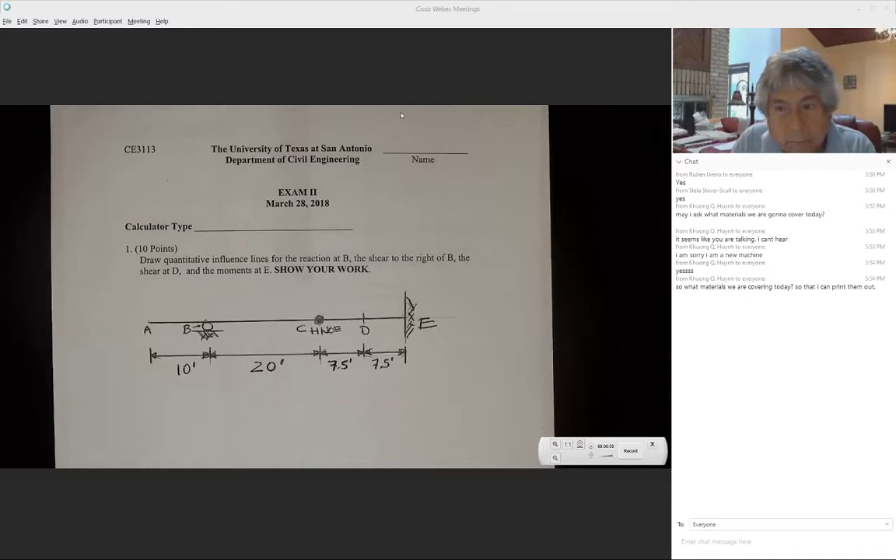Okay, you're very welcome.

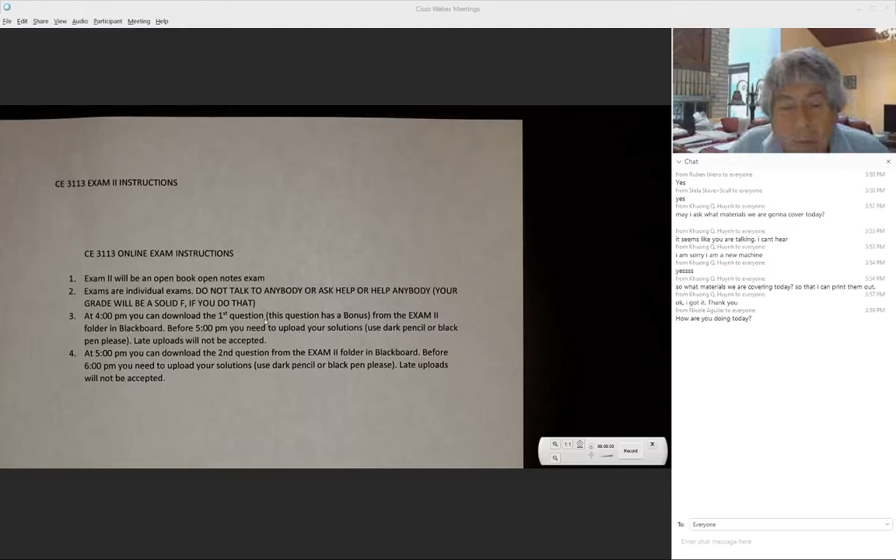And like I said also before, everything is open book and open notes, but don't talk to anybody. If somebody asks you for help, say no, and don't ask anybody for help.

I forgot to mention to everybody the other day that in this course, the grading is not going to change. It's going to be a letter, A, B, C, probably, I don't know about D's and F, but it's letter. It has not changed. The courses that changed to credit/no credit, you can still ask for a letter to be given to you, but we don't have that problem in this course.

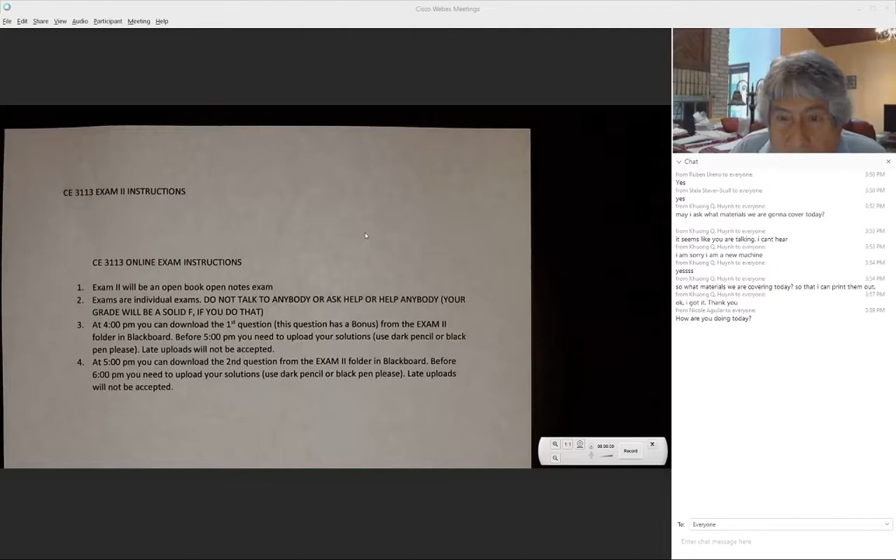Also, you already know that all the summer courses are going to be online. We don't know about the fall, but everything in the summer is going to be online.

Today I'm going to start the review, and I'm going to continue on Monday also with the review. In Blackboard you can find the review file, however I forgot to number the pages. So today is going to be a review, Nicole, and Monday also is going to be a review. I'm going to cover influence line for beams, influence line for trusses, deflection rotation for beams, and also for frame.

So this is the first problem. Any questions about anything, any clarification, concern before I start?

Okay, so I'm going to start now. We have 37 people in the room.

The day of the exam, besides you being able to download it, I will put problem number one on the screen the same way that I'm putting this in here. If you cannot see, tell me, I will increase the scale. I will zoom. So that's what's going in the exam.

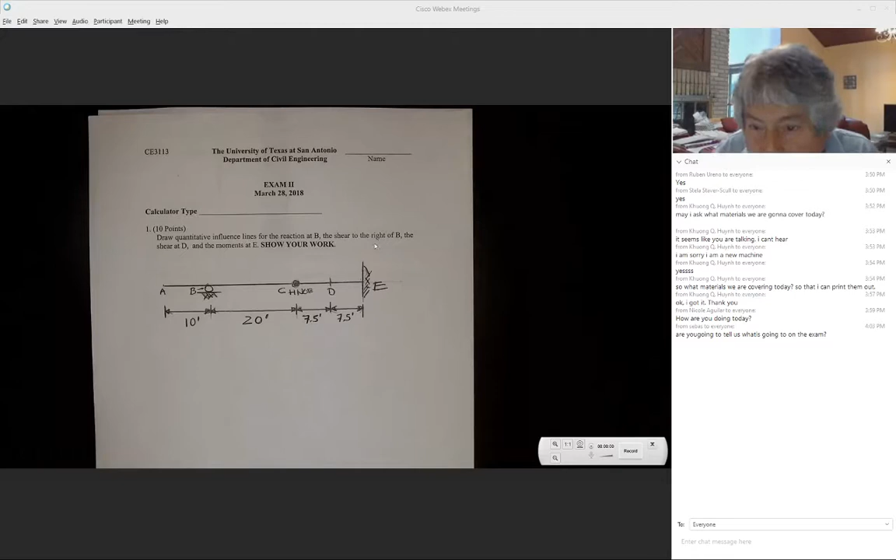I already told you what's going to be in the exam. It's going to be influence line, it's going to be deflection and rotation, and the bonus, one little bonus.

On Monday, if you come early, I'm going to tell you, I'm going to give you more detail, more focus about the exam. So make sure that you are on time on Monday. Any other question?

So the day of the exam, besides you being able to download it, I'm going to put it on the screen. I'm also going to put the chat, so if there's any question that you don't understand about the exam or whatever, let me know and I will make a clarification for everybody. I need you to turn your camera on during the exam, but your microphone off. If you don't have a camera, don't go and buy any camera, that's okay, I just want to see your face.

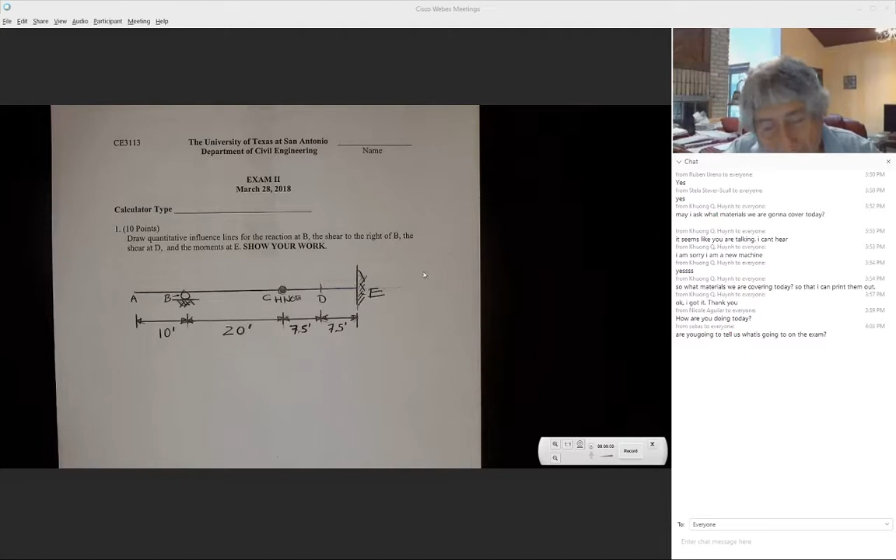So the day of the exam, this is going to appear something similar in front of you. And every page, you have to put your name and make sure that you use a black pen, very dark pen, or black pencil or whatever, but make sure I can read whatever you're going to send to me.

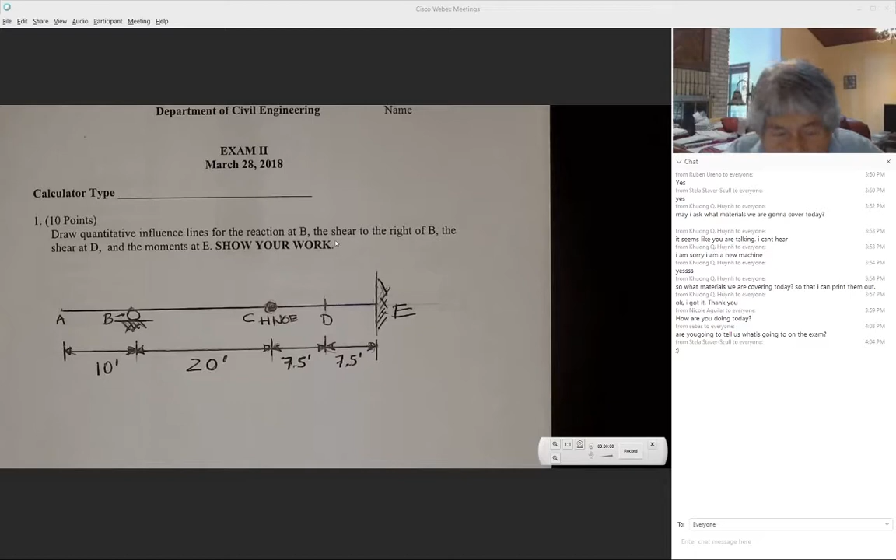In here, I want the reaction at B, the influence line for the reaction at B. We need to find out what's happening at B when the live load goes across the structure, whether it goes left to right or right to left—it makes no difference. The other question, which is always difficult, is the shear to the right of B: just a little bit to the right, there's a section, and we need to know how much the shear changes at this section as the load crosses the structure.

And the shear at D—so we need to know at this section what happens with the shear. And the last one is the moment at E.

So what I had done: since I need to put the load at A, I also need to put the load at B. To the right of B, I need to put the load. To the left of the hinge, I need to put it. To the left of section D, I need to put the load. And at E, I need to put the load. So I created all of these cases.

Even though some of them are obvious. This is the one where we need to compute the reaction when the unit load is at A. The second case, when the unit load is at B, is an obvious one, because when the unit load is at B, we know that the reaction at B is going to be equal to 1. So whenever we have this situation, the reaction at B equals 1.

And most of the time, I do not work this one out—I just show this one on top.

Why do we only put the load to the left of C and D? We put the load to the left of C because in one case the value here is going to be 1, and in the other case it's going to be 0. We put it only to the left of D because whatever we find here to the left of D, to the right it's going to be 1 minus whatever value we obtain here. If you worked it out to the left and to the right, you'd get exactly the same result.

So for the shear, we put it to the left because the value to the right is going to be 1 minus that value, and I'm going to show it here. This case is the easiest one because 1 at B—this is 1. The shear to the right is 0. The reaction is 1. The shear here is 0. Everything is 0 when this is here, with the reaction being 1.

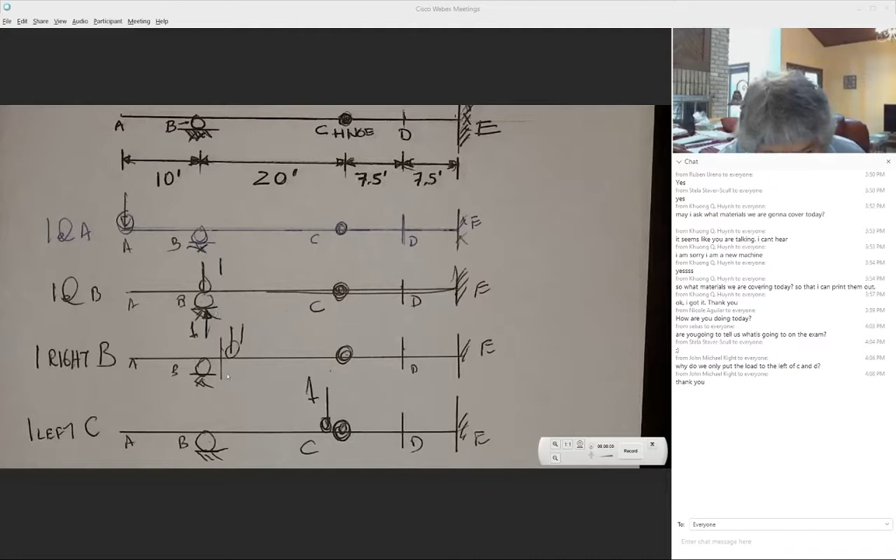I have put another case—this is a section to the right of support B. I put the unit load to the right because the previous case had the unit load to the left. So I'm going to create one just a little bit to the right. This is the case mentioned before.

We do it just to the left of the hinge because at one time it's going to be 1 and the other time it's going to be 0, since the shear here goes from 0 to 1 or from 1 to 0. And this is the one I was saying for the shear at D—we just put one to the left because whatever value we obtain here, the next one is going to be 1 minus that value. And of course this is an easy one, the last one.

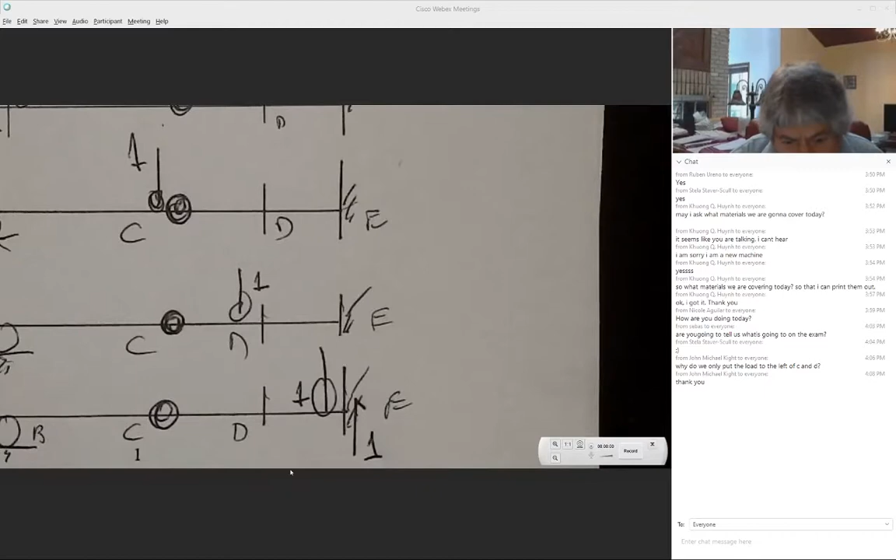Because the unit load is at E, the reaction at E is going to be 1, and there is no more. So I'm going to change the scale, and these are the cases. I never do this one, and I never do this one—I just want you to know.

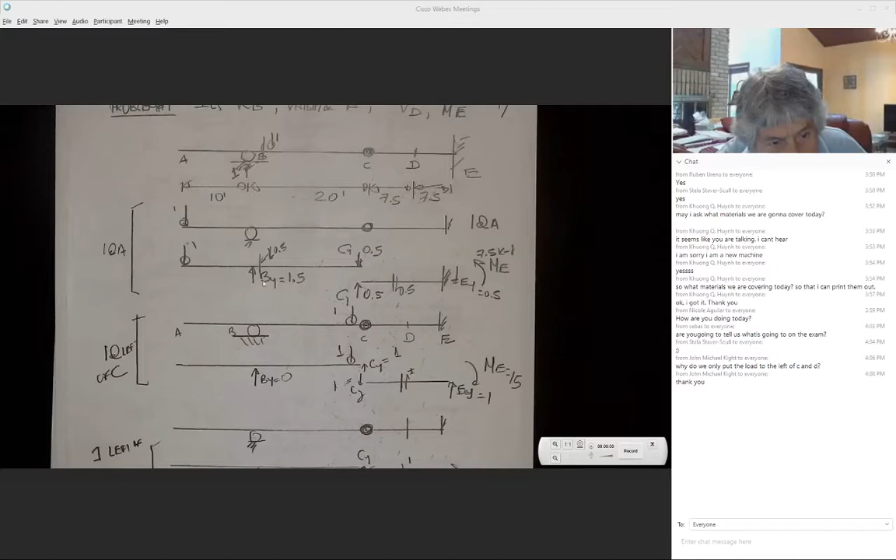And I had computed, since they want the shear to the right of B, I have taken this free body. Look at this free body. I'm taking the free body and doing summation of forces in Y. We have 1 going down and 1.5 going up. The shear in here is 0.5 going down.

And I'm using this free body. So this shear is positive or negative? Anybody?

Look, I'm taking this free body here. I'm computing the shear just to the right of B. By definition positive, this is positive. And don't forget, both of them, this is the right side of the free body, down positive, left side up.

So I was just taking advantage of this free body to check this body. But now I have to transfer this force, equal and opposite. Look, these are internal forces. These forces, we don't see them. We only see these forces when we take our free body. The 0.5 that I computed from here, equal and opposite, 0.5. If I do summation of forces in Y, and here I have to go down 0.5, equilibrium.

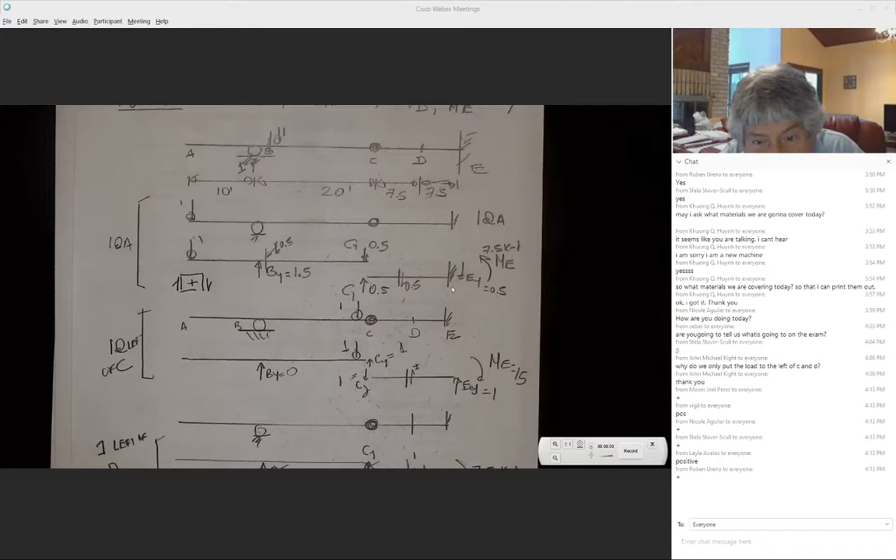If I apply moment about the wall, 0.5 times this distance, that is 15. This is 15. 0.5 times 15 is 7.5. My acting moment goes in this direction, the wall shows one in the opposite.

So if you look at my first computation, when one is at A, they want the reaction at B, the shear to the right of B, the shear at D, and the moment at E. So when the unit load is at this location: the reaction at B is 1.5, the shear to the right of B is 0.5, and the moment here at the wall, at E, is 7.5.

And if you look at where this moment acts, where is the compression, top or bottom, if you do what I normally do with this, and you bend it. So where is the compression here, top or bottom? Top. So this is going to go on the top whenever you draw the influence line for the moment at E, goes on the top.

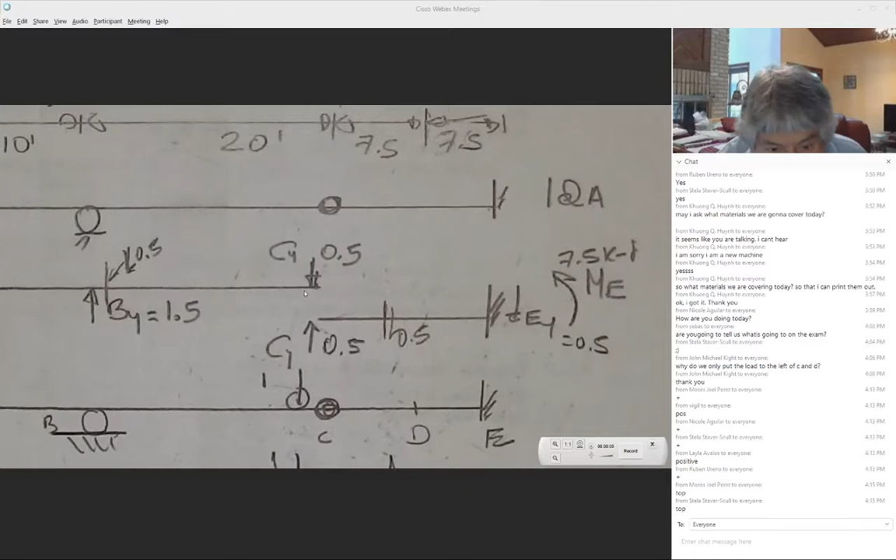Look at the shear to the right, or the shear at section D. I'm taking this section in here just to compute its value. So we have 0.5, they have to go 0.5 down. And based on what we did before, positive or negative? Positive.

I have here at the bottom of the page the values that we just computed for the influence line for the reaction at B. When the unit load was at this location, we saw it produce 1.5. The shear to the right of B at this location, you told me that was positive and 0.5. The shear at D, you told me that was positive and 0.5. The moment at E, you told me that was 7.5 on the top. So all of these values that you can see in here, when the unit load is at this location, is producing those values.

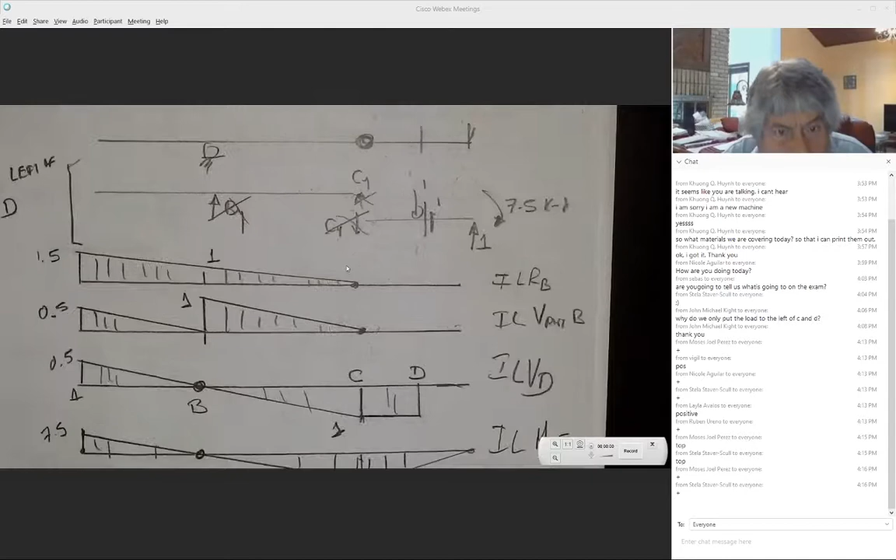When the unit load is at A, this reaction is 1.5. The shear to the right is 0.5. The shear at D is 0.5. The moment is 7.5. So all that we had done, we found all of this value.

With this case, any question up to this point about that?

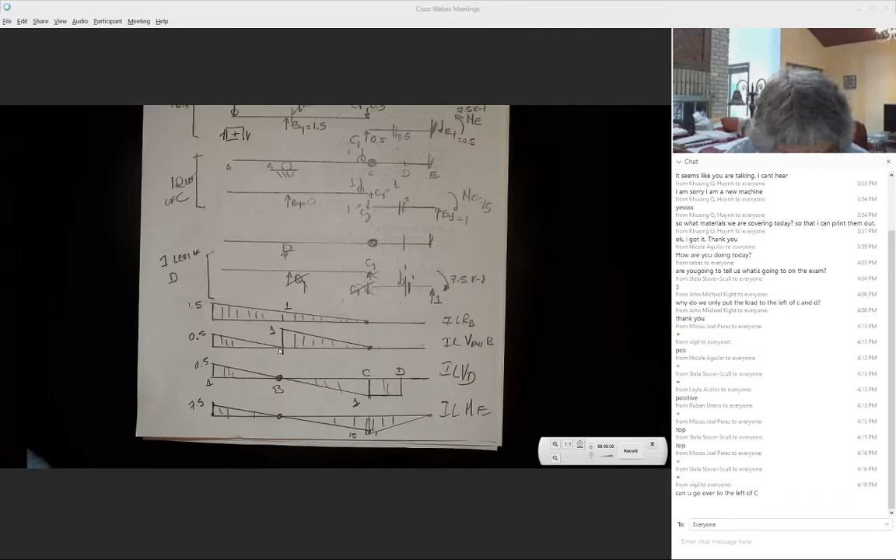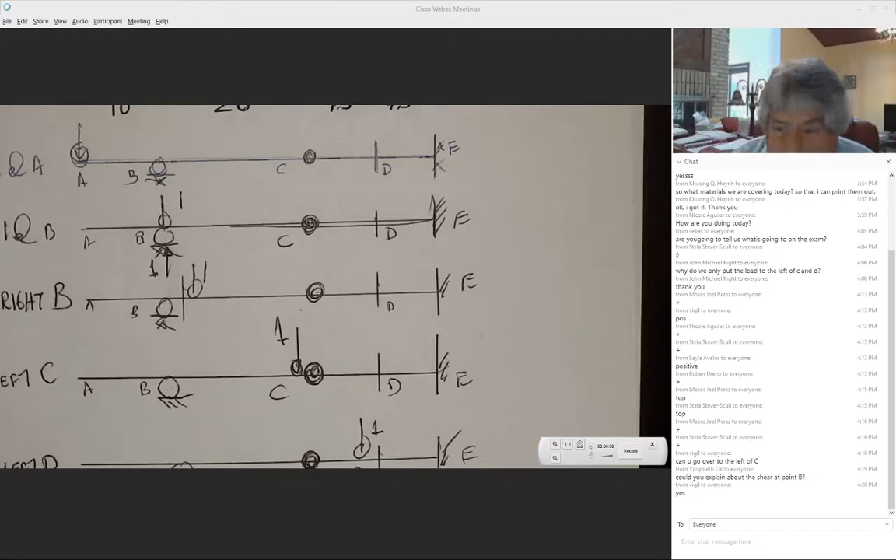and this is, Lik, the shear at point B. I'm going to go back to the other, but I'm going to do this. I want the influence line for the reaction at B, the shear to the right of B, the shear at D, and the moment at E.

Lik is asking the shear at point B. At point B, we do not have shear. At point B, we only have a reaction. We cannot ask for the shear at B. We need to ask for the reaction at B. We could ask shear to the left of B, or like in this question, the shear to the right of B. So this is B.

We want to know the shear to the right of B. So, Lik, what are you asking? I really don't know exactly what you're asking. There's no shear at B. There's only a reaction at B. But we do have shear to the left.

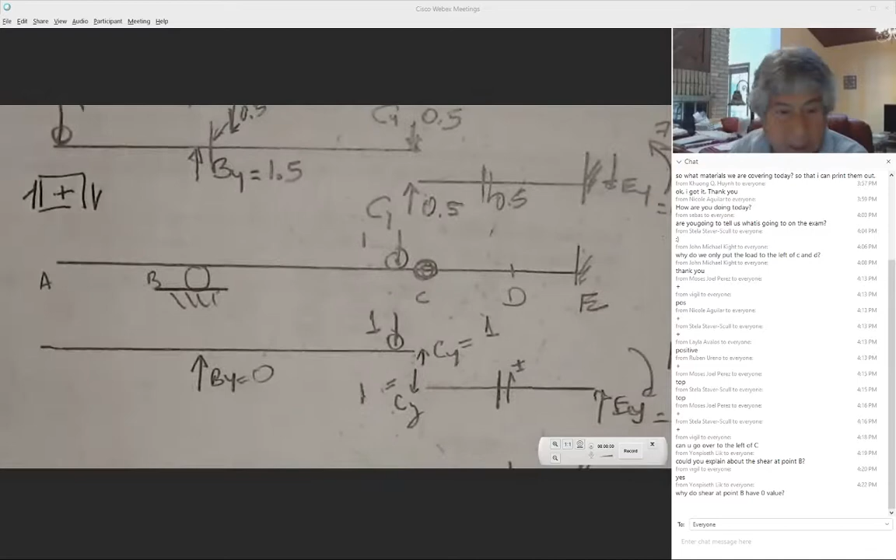Why does shear at point B have zero value? Okay, and again, there's no shear at B. There is shear to the right of B. I think that's what you're asking. I think, if I'm not getting confused, this is the influence line for the shear to the right of B, and this is zero.

Are you asking for that, or are you asking for this? Yes, Professor, what are you asking? I'm asking about the shear, why it goes to 0 and goes to 1. Okay, I'm going to explain it to you right now. So the question is, this is to the right of B. This is not at B, because at B we only had a reaction. So I'm going to show you right now.

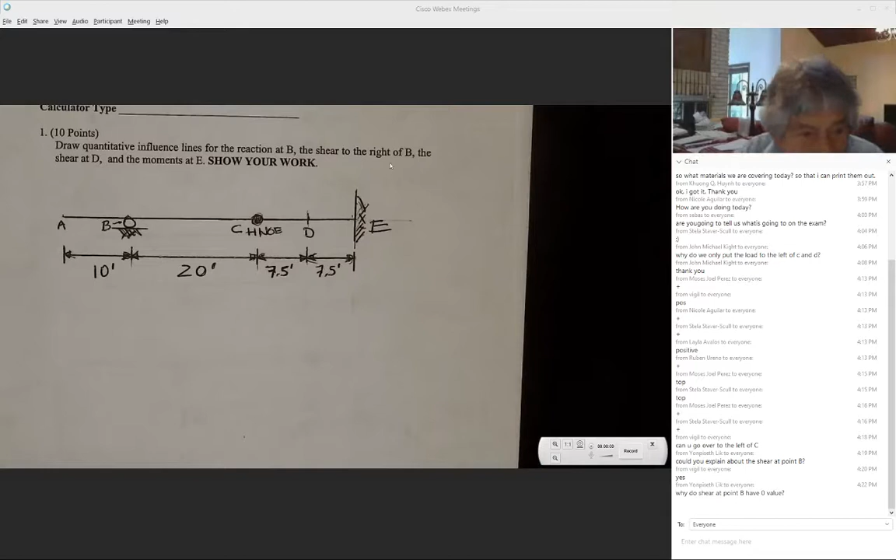I'm going to use a clean sheet, and I want everybody to pay attention because this is a very good question. Look, I don't know, this is what I see in my house, I see it huge, it's huge. I don't know what you see on your screen, but

this is a section to the right of B, and we want to find the shear at this location. So I'm going to put, because the case that we're looking at is this. This is the case that we have right now.

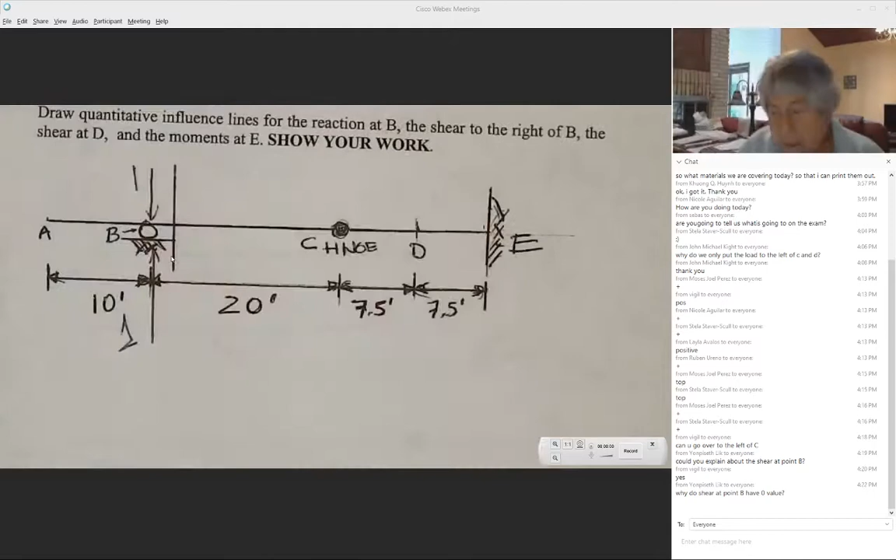When the load is over this support, right, everything else is going to be zero. If I take this free body, I'm going to take it in here, because it is a good question. So whenever I say take a free body, I'm taking this free body. So this is the same free body, and here I change. And this is one, and this is one.

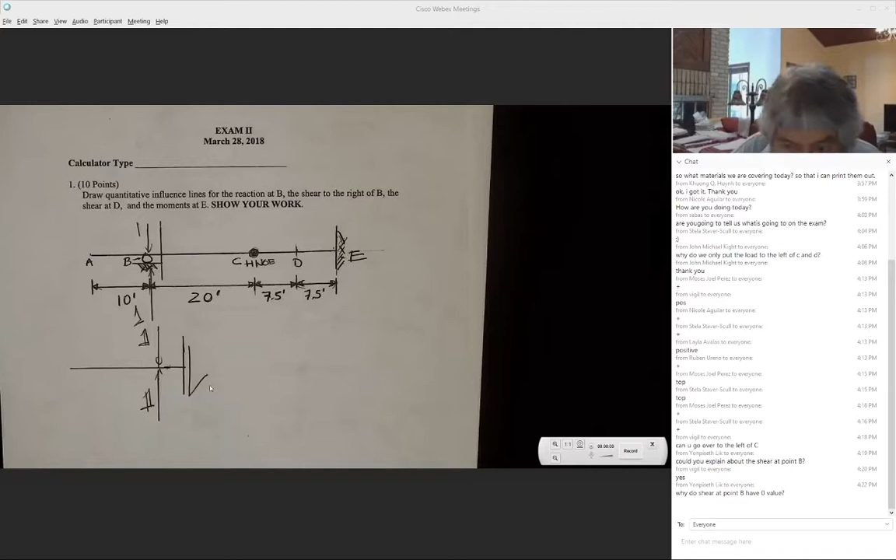If I do summation of forces in Y, what is this value of the shear in here? 0. Where is the load? Where is this load? This load is at B.

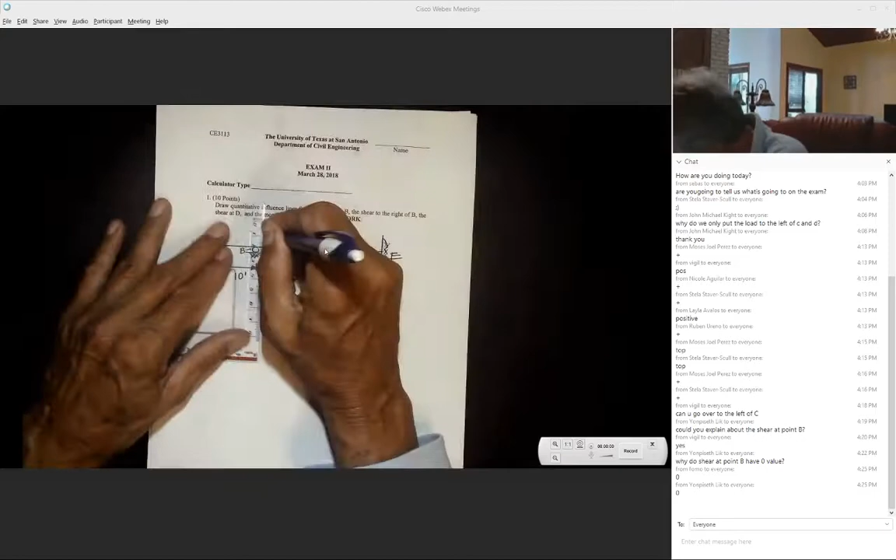This is my influence line for the shear to the right of B. When the load is at B, the value is 0. So I'm going to go ahead and show you something else. The load has moved to this location, because this is just a little bit to the right of support B.

What is this reaction in here? What is that reaction in there? Anybody? When this is just a little bit like 0.0000001 to the right, what is this? Yeah, 1. Because it's 0.999999, I'm going to take the free body. Look at the difference: before, the load was over the support, and it was 0. This is my same free body.

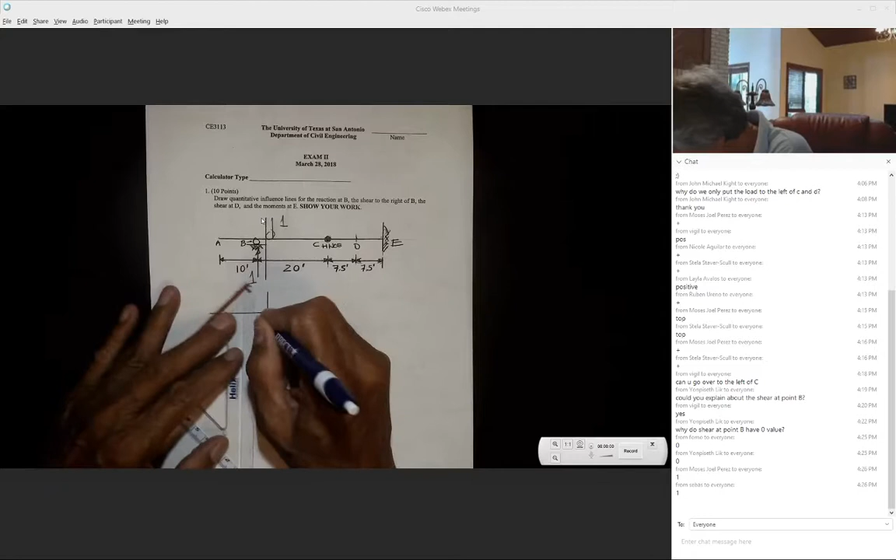I'm taking this free body. Does the load appear on my free body? Look, this is my free body. Do I need to put the 1 in there?

No. So this is like when I told you in class, you go to the international border, you are on the bridge. This is USA, this is Mexico. You already went to a different country. This load is no longer in here.

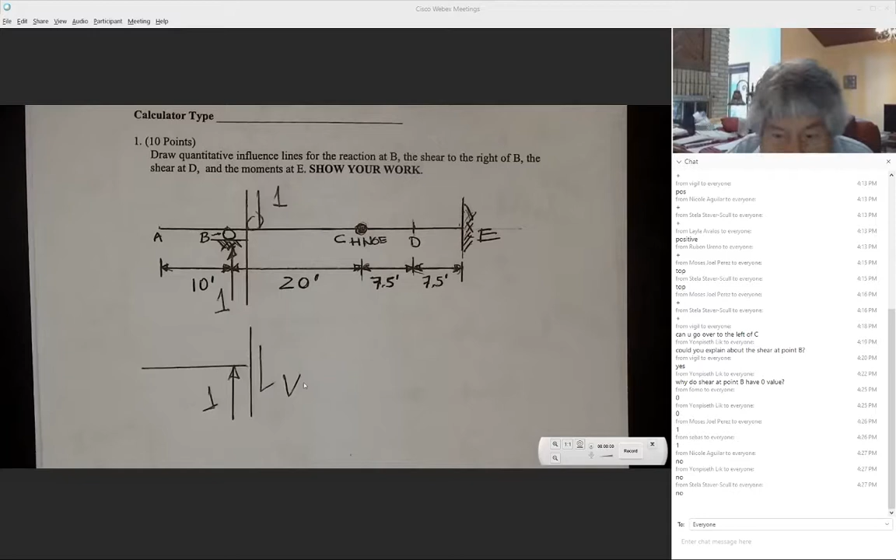So when I do summation of forces in Y, what is the value of this shear? One. Positive or negative? Good.

So this is the influence line for the shear to the right of B. Look, it went from 0 to positive 1. And that is the reason. But this is for a section just to the right of B.

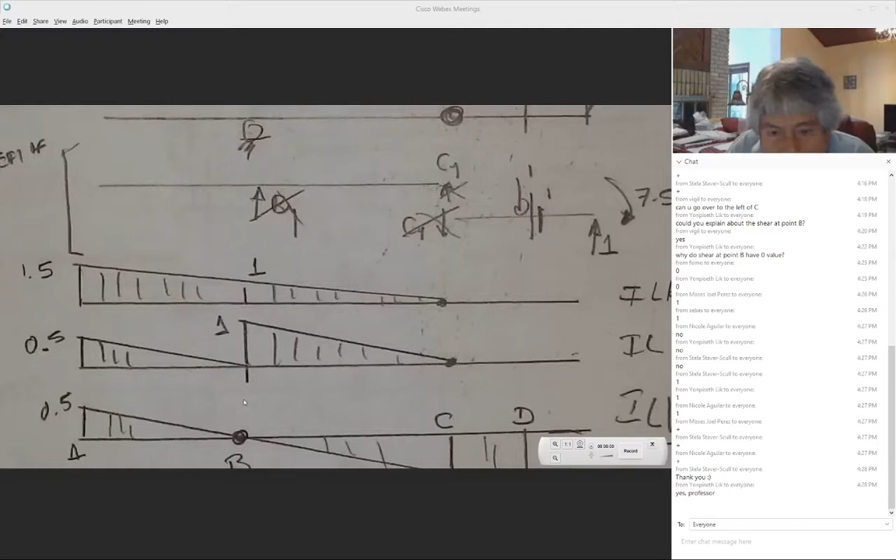Lik, do you get it? Lik. Stela. Okay, good.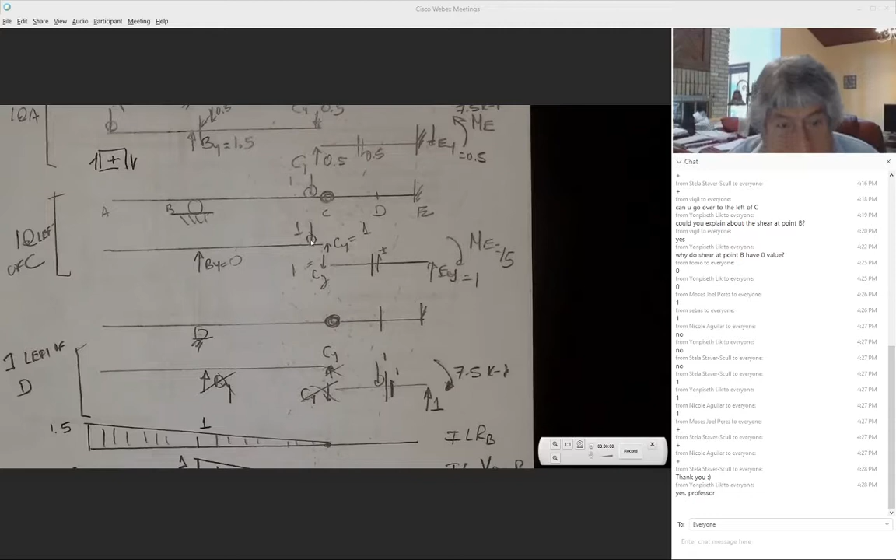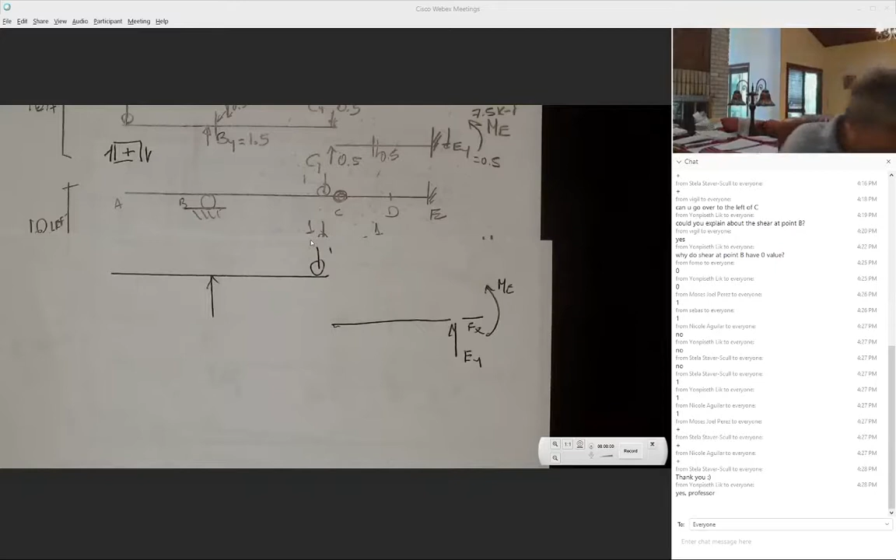that whenever I break it, I have to look at the forces that I have. So at C, I'm going to have a force called Cy. I have to have an equal and opposite. So whenever I break this at the hinge, I have to show these internal forces as equal and opposite.

So now I'm going to apply moment about this point. And since both of them, there's no other force, I have to apply moment here because we learned that a long time ago in statics. I need to get rid of this force. This force times this distance and this force times the same distance.

It's obvious that this is going to be 1 because the distances are exactly the same. And if this is 1, this has to be also 1 because internal forces gave me equal. This has to be equal and opposite.

So now that I know that when I do summation of forces in Y, 1 and 1, what is the value of this reaction? If I have 1 and 1, what is this reaction here? Anybody? 0.

So that is gone. That means that when I do summation of forces in Y and here, this is going to be 1. And the moment there is going to be 1 times 15. So this moment here is 15.

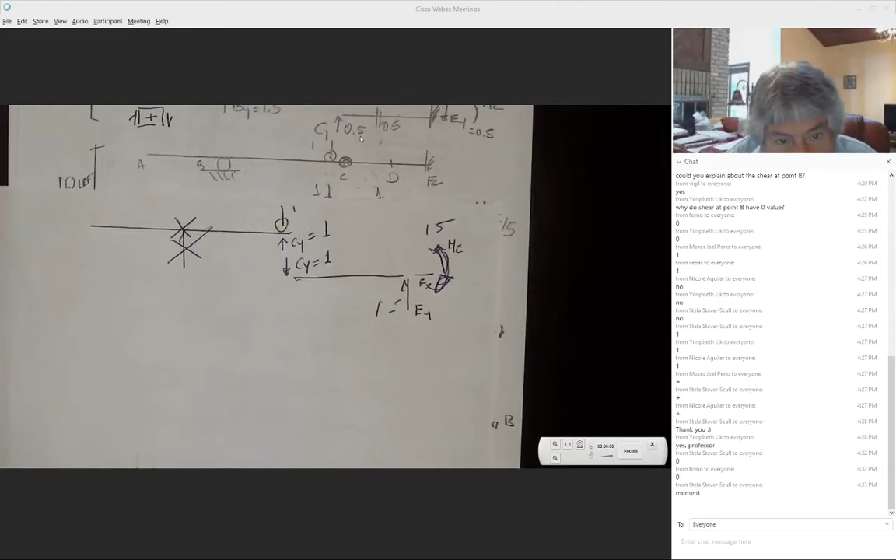So look, when the unit load is to the left of the hinge, this is 1. If I put the unit load to the right, what is the value that I'm expecting in here? If instead of here I put it in here, what is the internal value I want to find? 0. Because at any location, it has to be equal to 1. I already have 1, the other one has to be 0. Like we did from the shear to the right of B, 0 went to 1. So this is what I have.

The unit load is to the left of C, only one load at a time. This can be equal and opposite, one and fifteen.

So whenever I look at this situation, when the load is at this location, what is the reaction at B? Zero. What is the shear to the right of B? Look at this in my case.

The unit load is to the left of the hinge. So my reaction at B is zero. What is the shear to the right of B? Anybody? Shear to the right of B?

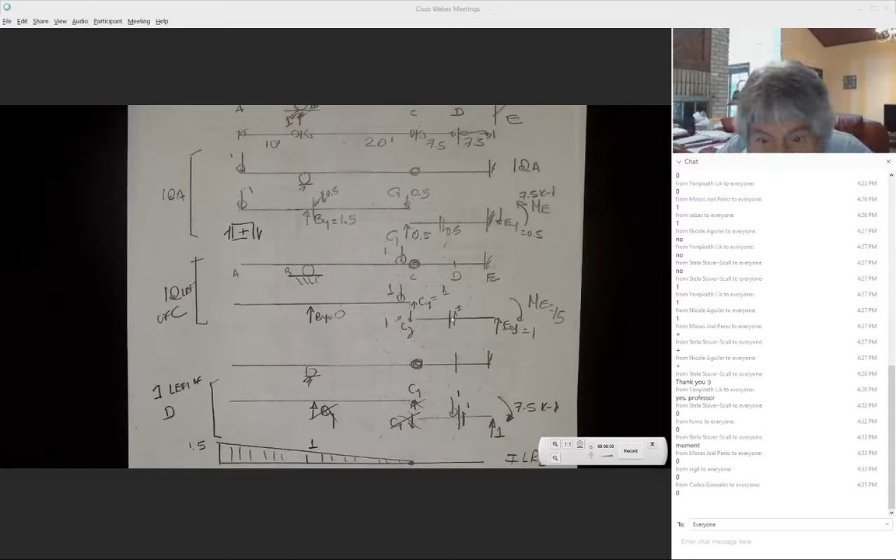Zero. And look, the shear at D, look, I had this free body. One down, one up. The magnitude of the shear is one. Positive or negative?

Listen here. Negative, correct. So it's a one. And when the unit load is at this location, look, what is the moment at E? Fifteen. But this moment goes on the top or on the bottom?

Look, where is the compression, top or bottom? Where is the compression? Bottom. So now I'm going to go to the influence line.

When the unit load is at this location, look, here on the top, the shear at B is zero. The shear to the right of B is zero. The shear at D is one.

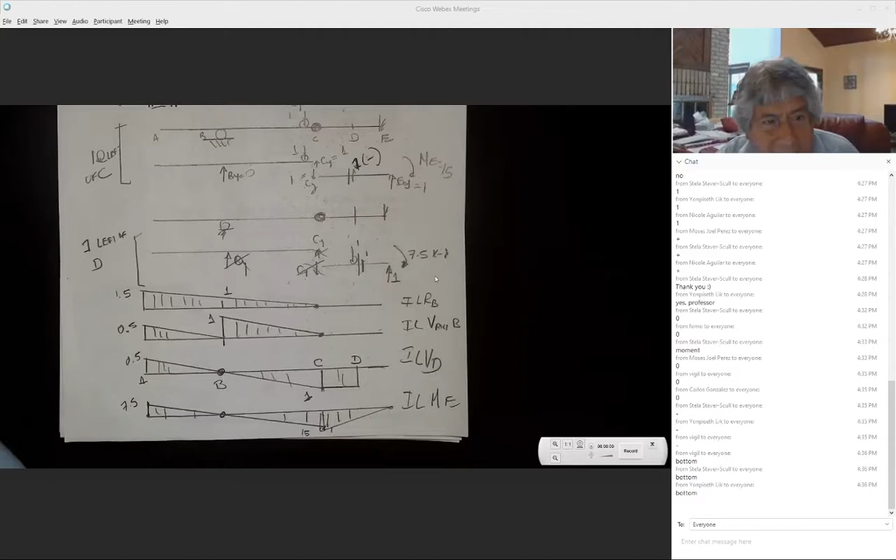And the last case that I had to do is this one. Shear to the left of D, because whatever value I can find by computation here, the other one is going to be one minus that value. So this is the case that I have.

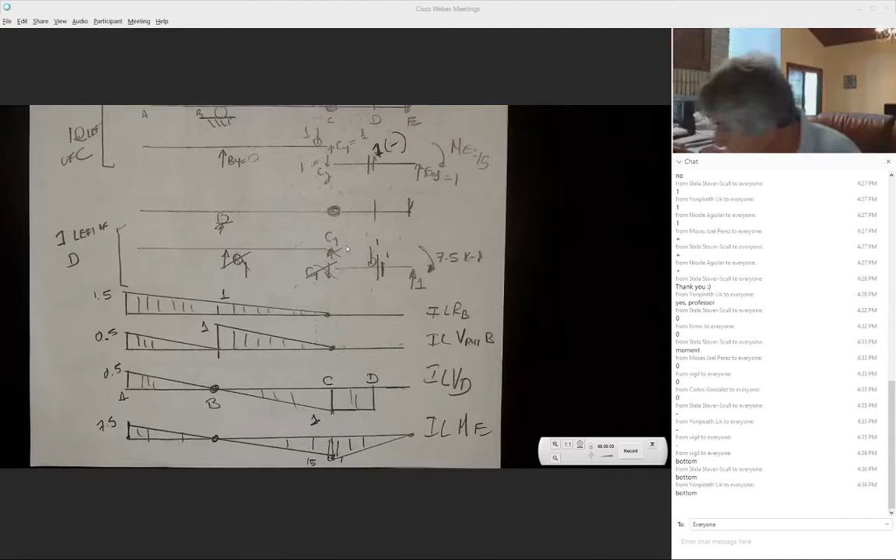In here, my shear force is to the left of this section. So I broke it into two free bodies. And when I break it into two free bodies, I'm supposed to have a reaction here, internal force, internal force. And when I work with this one, when I do summation of moment about this point, I'm going to have

Cy times the distance 20 equal to 0. Cy times the distance 20 equal to 0. Goes to the right of D, the shear goes to 0.

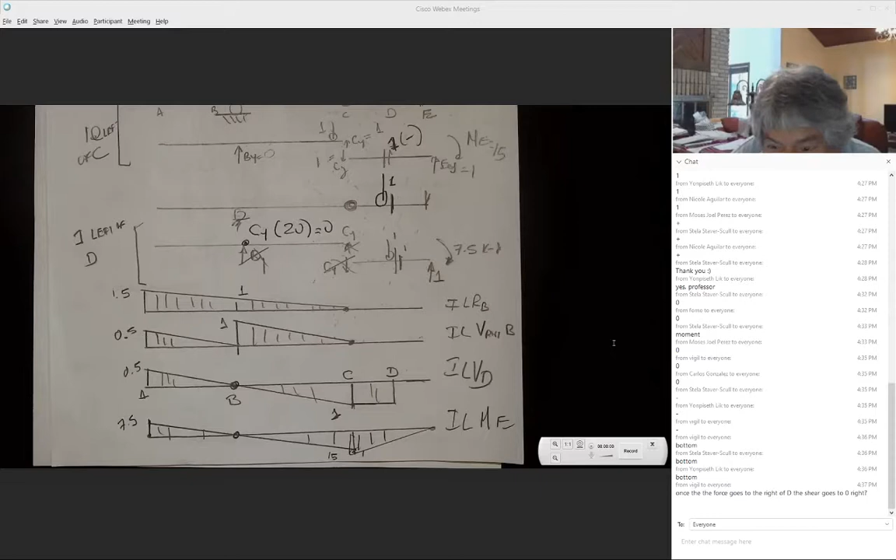Vigil. When the force goes to the right of D, the shear goes to 0. I'm going to show you in a little while, but that's a good observation.

Look, let's do this one first. So, look, I apply a moment on this point. Cy times 20 for a reaction to multiply this and be equal to 0, that means that Cy has to be 0. That's why I killed Cy in here.

And I did summation of forces in y, By is also. This case is where most of the students made a mistake. They put a one in here and they put a one in here. It's not going to be in equilibrium because you're going to have a moment. So the only way that this could be in equilibrium is this is 0 and this is 0, and this is the proof.

So if this Cy is 0, this has to be also 0 because they have to be equal and opposite. So now I come to here. I have one, summation of forces in y to be in equilibrium, one. Summation of moment, this is 7.5, this moment 7.5.

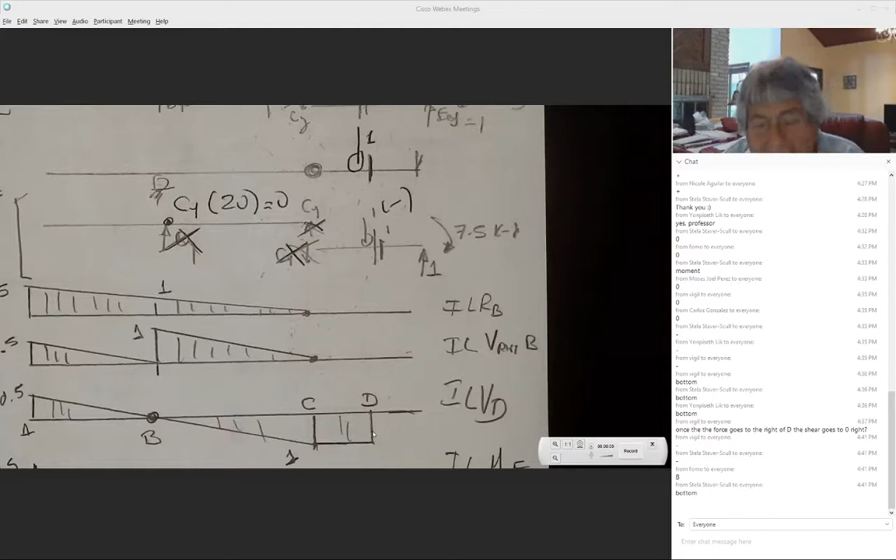Look, one. And we always say, whatever we're doing here, if one is 0.2, the other one is 0.8. If this is 0.6, the other one is 0.4. And since this is one, the other one is going to be 0. So if this is 0, I need to find out what is the value in here. And the value in there is given in this case.

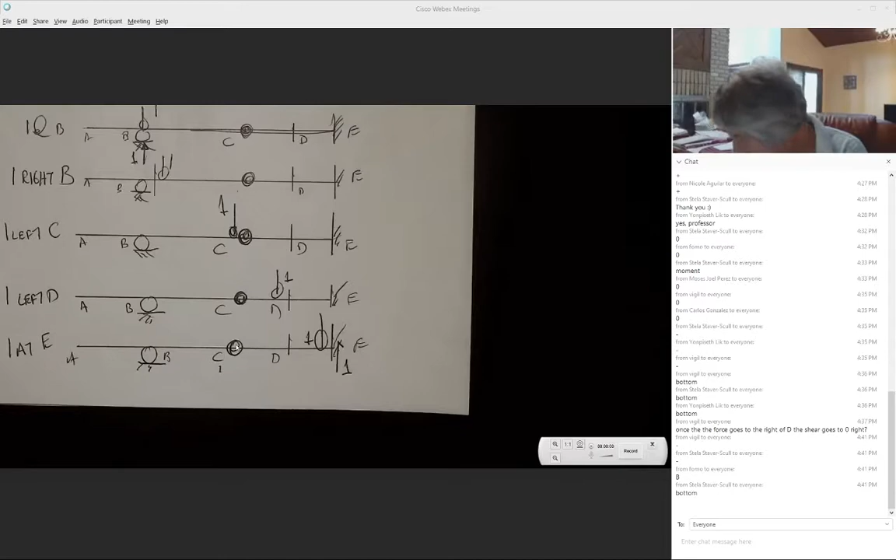When the unit load is at this location, this is 1, and everything else is 0. That's why the influence line goes from 0 to 0. So that was a good observation. And look, when the unit load is at this location, the moment at 7.5 — you told me it was at the bottom. Look, this is 15. This in here is 7.5 because it's exactly the middle.

When the unit load is in here, everything is there. Any questions about this problem?

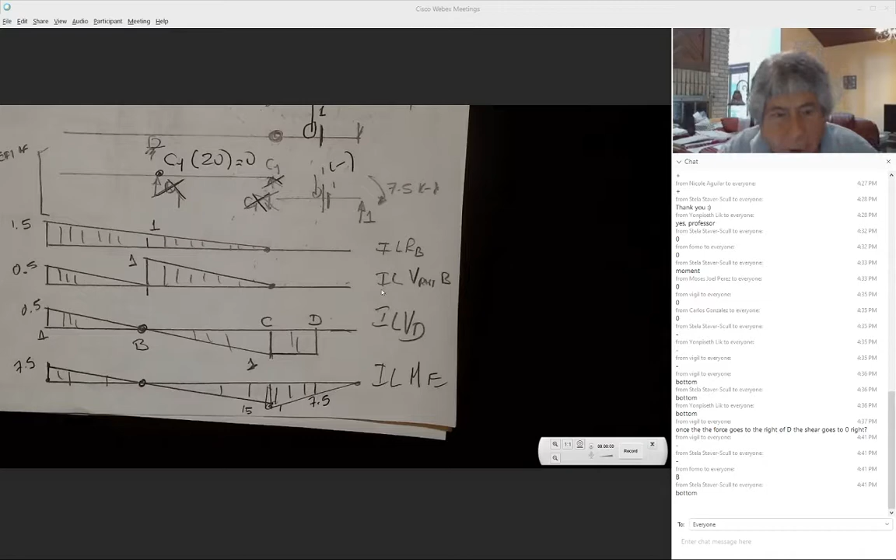If you think of another question later, just let me know by email, or when I come back to the classroom. But all of these problems are solved the same way. Once you get your exam, you read it and find out what I asked. It's like shear to the right of B. We do not have shear at B, only reaction. There's shear to the right and shear to the left. Always, the unit load is placed at the end, at the support, to the left or right of the hinge. For shear, we put it to the left because to the right is going to be 1 minus. For the moment, we just put it in here.

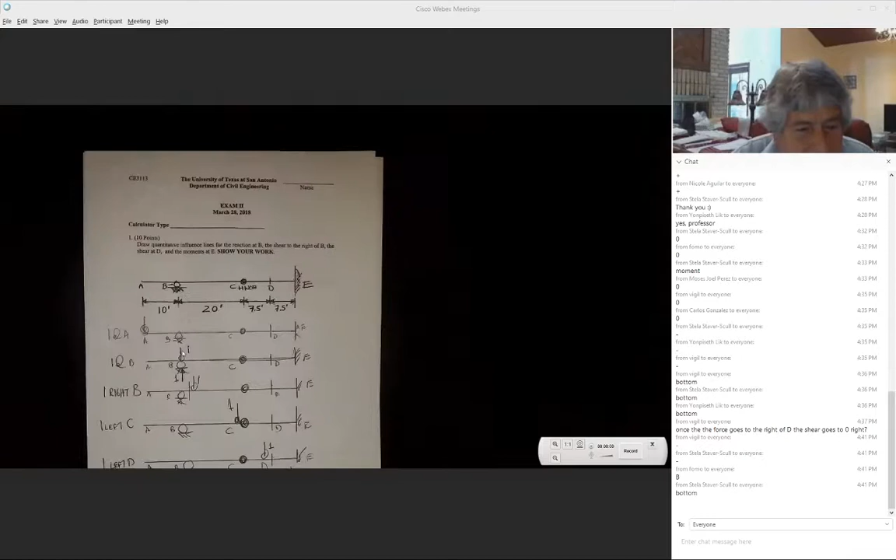So all of these are approached the same way, and that's why I put it here. I put the case with the unit load at this location. After that, it moved to B. After that, it moved because we had to consider the right of B — it just moved to the right because this is at the support. I put one to the left of the hinge, one to the left of the section where I want to compute the shear, and one at the end. So all of these are the typical locations for the unit load.

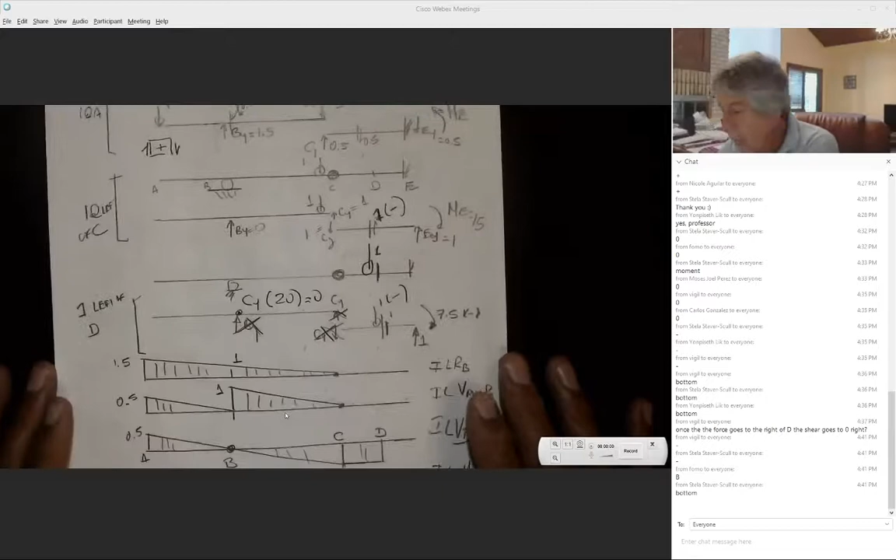And when I ask you to show your work, this is what I want — I want to see how you did it, I want to see your work. If you don't show me your work, you get no points. Here are the answers to what I was asking you to do. I'm going to go to the next problem since nobody's asking questions. If you think of a question, you have to let me know.

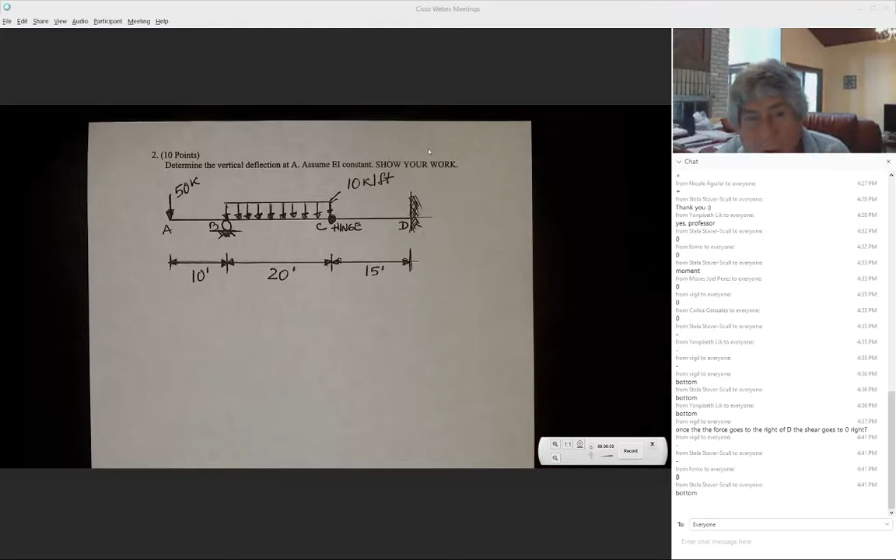So on the day of the exam, for question number 2, you will download it from the folder, but I will also put question number 2 on the screen. And like I said before, your cameras are going to be on, microphone off, and the chat on so you can ask me questions. In this problem, we need the vertical deflection at A.

So at this point, the deflection could either be down or upward. This is a determinate structure — everything is determinate right now. So we have 3 unknowns plus 1, giving 4. We always have 3 equations plus the condition equation.

Whenever we look at this problem, I want to use virtual work. How many sections, how many cuts did I have to do to cover the entire structure? 3 — one in here between A and the reaction, one in here between B and C, and one in here between C and D.

Something you have to remember: when I look at this, how many forces do I have at C, at the hinge? How many internal forces do I have here? But the only force I'm interested in is the vertical force, because there's no horizontal. So in reality, I have 1 force.

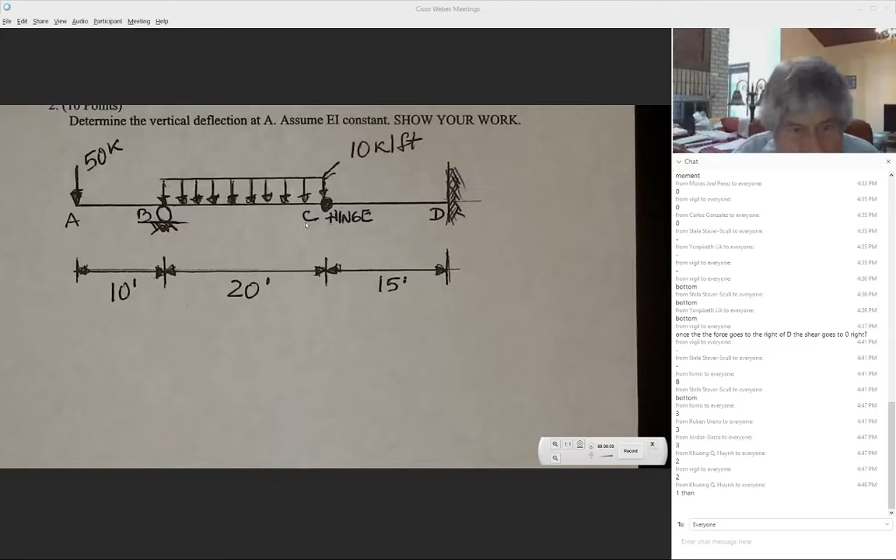So whenever you look at this and break it into sections, you have to determine the easiest way to solve the problem. So I have here 1, 2, and 3 sections. To solve this problem, I'm going to break it into free bodies: A, B, C, and C, D.

Can I compute By by applying a moment about D? Anybody? Can I apply moment about D and find By? No, because I have a moment in here — I cannot get rid of this moment. So I had to break it into 2 free bodies. Since they want the vertical deflection at A, I'm going to put a unit load at A, my dummy load.

So here at the bottom of this page, I did not include this. I did it after I uploaded everything because I thought this is easier for you to understand. It will help you understand the solution, because this is a vertical deflection. If they want a horizontal deflection, I will put it in here.

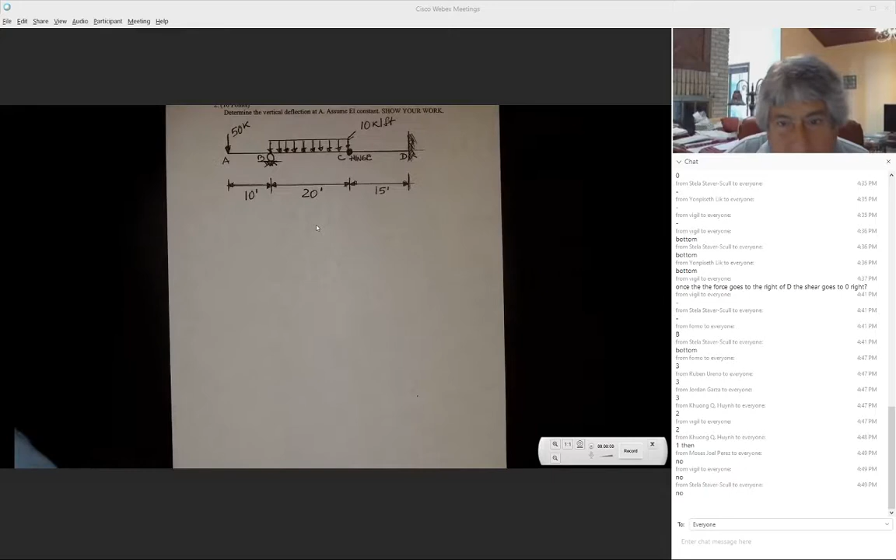So I'm going to go back to this problem. Can I have a horizontal deflection for this beam? Can I have a horizontal deflection? Anybody? No, because we cannot move this wall. We cannot move it to the right, and the wall cannot move.

But in the past, I'm given a problem, and people, I don't know how, they found a deflection. But this time I'm not going to trick you. Everything is going to be straight. Believe me, it's a hard time for you, for me, for our family, for everybody. So I'm not gonna do anything that's gonna drive you crazy. I think you're already crazy. I don't want you to have any problem.

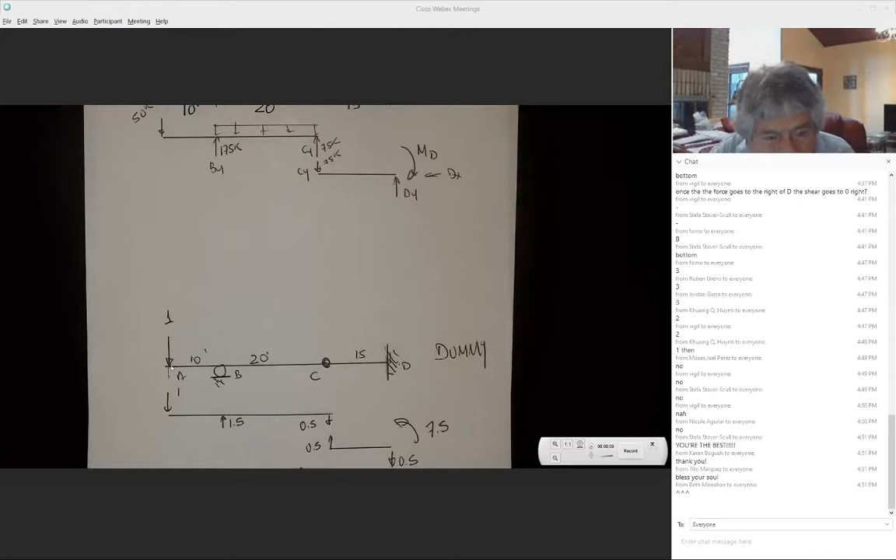So whenever we look at this, I'm gonna go back to this drawing. I'll take it like it is. So look at this: vertical deflection. I'm assuming that it's gonna go down, so I put it in.

This is my dummy, and on the top of the page is the given load. I was telling you before, I had to break it in here. And when I break it in here, I'm going to have CY. I apply moment about this point, solve for 75, then do a summation of forces in Y and find this. I turn the 75 here, equal and opposite. Internal forces, we don't see them, but they have to be equal and opposite.

I did a summation of forces in Y here, and when I did that, this is also 75. I didn't put it in there because I don't need it. But just in case you need it, this is going to be 75 times 15. But I didn't write it because I don't need it. Why don't I need it? Because I'm going to put my origin in here.

For this section, I put my origin in here. So if I put my origin here, what is the moment in terms of x? If I use this free body with the origin here for this section, what is my moment? 75x. That's why I didn't want to mess with this, I didn't want to touch it. I just wanted to point it out.

So I did compute these reactions, and I didn't use them because I don't need them. And time is the worst enemy, so one second, probably it will help me later.

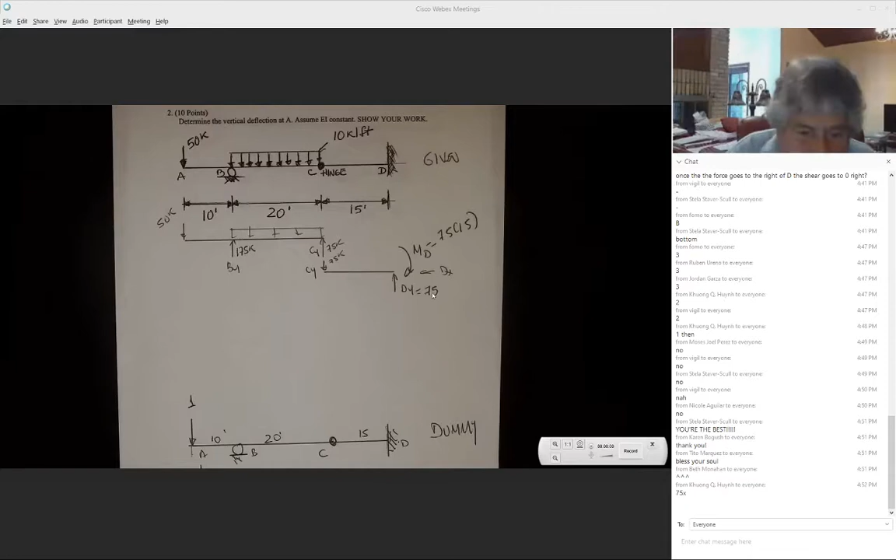And I did the same in here. I broke it in here. I compute 0.5. Those two, this one times 10 had to be equal to 0.5 times 20. So they go down and this goes up. 1.5, equal and opposite. I computed this just in case.

But if I put the origin in here, what is my moment for letter M in terms of X? What is the moment in here? 0.5x. Good.

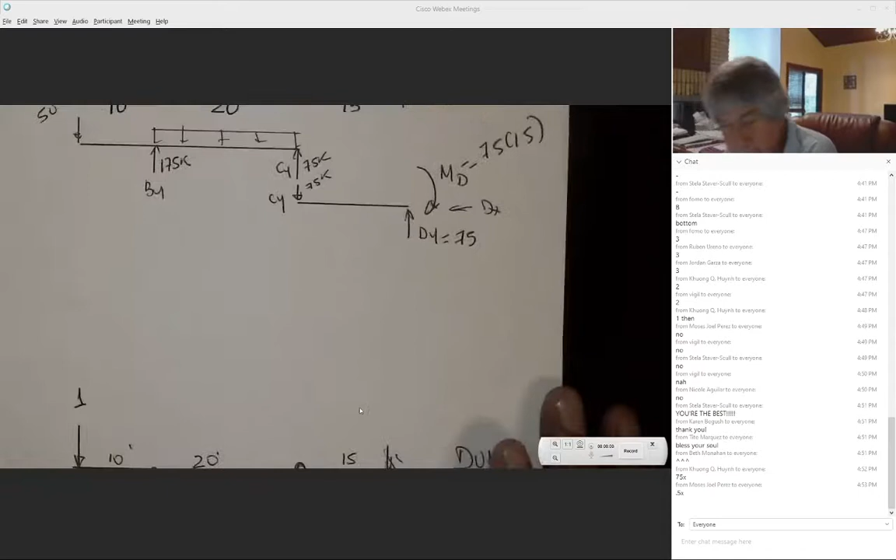So my section, all of these are section 1. Look, section 1, for the dummy load. For the dummy load is also section 1. I'm going to put the origin because it's easy. Look, for section 1, I'm going to put the origin in here because it's very easy. So I'm going to come here.

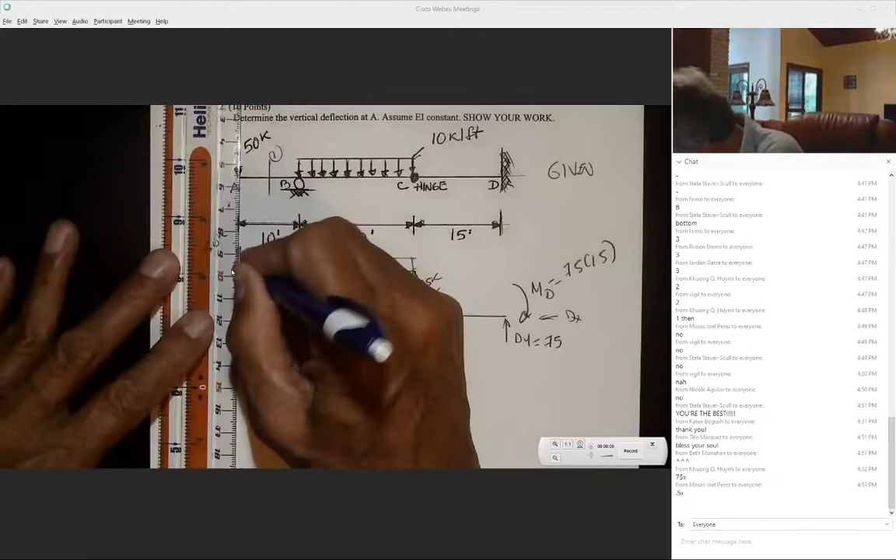X, and for section 1 in here, I'm going to do the same. I'm going to put my X here. Now, but what is the moment? The moment in here, what is the moment in here? This is X. What is the moment?

50X, right? So normally I would have written this on top of the structure, but I'm going to take it here and put my free body. Only one force, 50. I'm going to come to the bottom, and you already told me what the moment was. I'm going to put it in here.

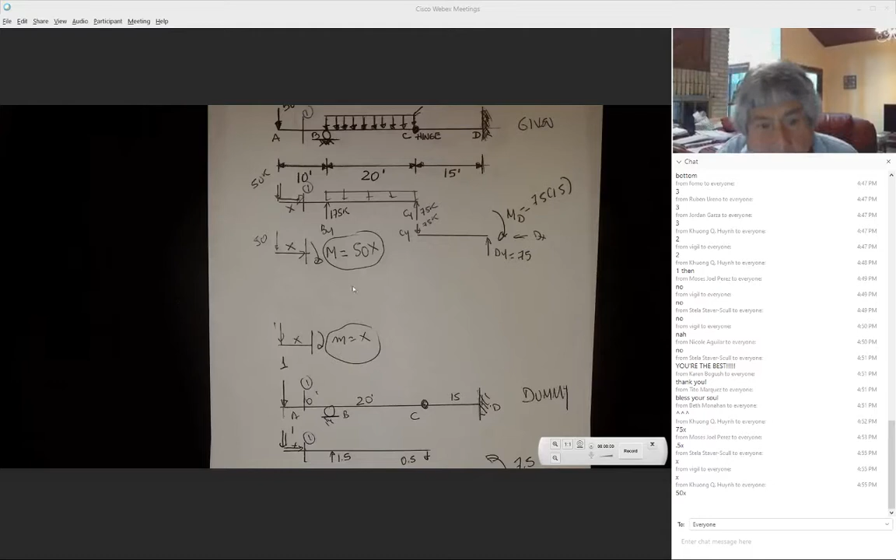So I had those two. Remember, they have to be assumed in the same direction. If you put it in the opposite direction, both of them are the same, minus and minus becomes plus. So this is good between 0 and 10, for both of them, X between 0 and 10. So now I'm going to take my second section, which is going to be here.

Section 2 and section 2. I'm going to put the origin in here because it's much easier. So this is going to be my origin. I have to put the origin at the same location for this one.

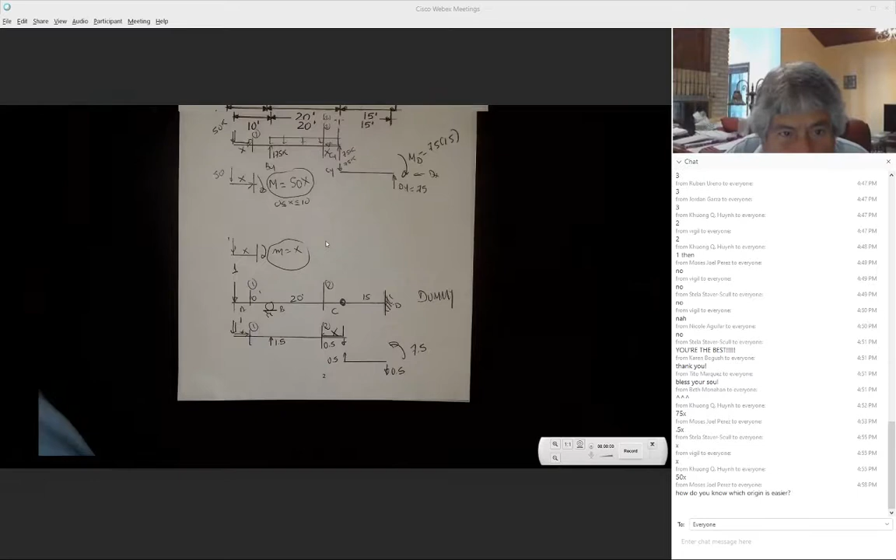How do you know which origin is easier? Okay, and that's a very good question.

Remember that the moment, if I use this free body, or I use all of this free body, the answer is going to be exactly the same. I had a choice: I put the origin at this location or the origin at this location. The equation here, in this region, is only good between 0 and 10. So I can either put my origin here or I put my origin in here, and just include this. Don't you have to put a section which includes the reaction at B?

No, no, because look, let me ask you a question before I show you why. Look, if I put the origin in here, or I put the origin in here?

If I put the origin in here, it's going to be 50x. If I put the origin in here, I have to consider all of this, or up to this point, to give me the same equation. When I replace the value between 0 and 10, it's going to give me exactly the same value. So which is better, to put the origin at this location or the origin at this location? At this location, I have to include all of these forces. Which one is visually easier?

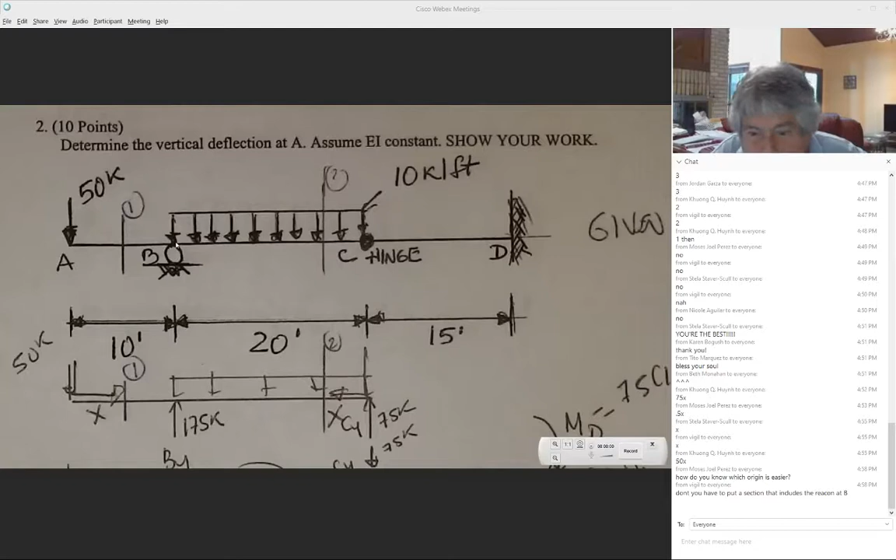Origin here, origin here. At A. Now I'm going to show you something.

Look, for this member here, for all of this, this is the shape of the moment diagram. This is a straight line, the parabola. And we're talking about this point, section 1, right? Physically, I'm going to ask you: look, you are in here and you want to get to this point. You are in here and you want to get to this point, right? So,

visually, I don't know, you are 20, I don't remember, 30, but you are a young man. But look, if you walk from here to get to this point, or you walk all the way to here to get to the same point, because the moment is continuous, which one is easier, visually? This one or that one, physically?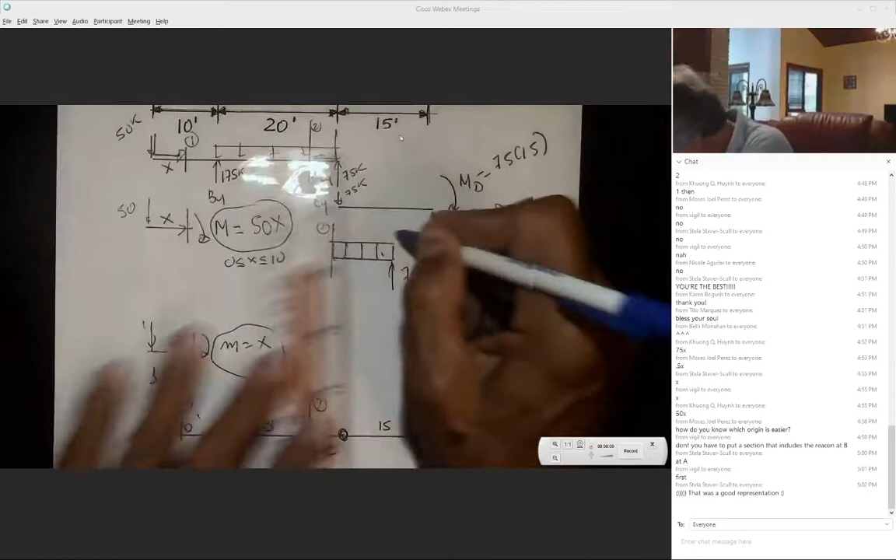So this free body 2 is this one: 10x, 75x. Which direction do you want me to assume the moment, large moment here? Clockwise or counterclockwise? Anybody? It makes no difference. Tell me which direction you want me to assume large M in here. Looks like counterclockwise, the first person. The M.

I'm going to put in here the free body for the dummy load. This is the free body for the dummy load. I'm going to put it below.

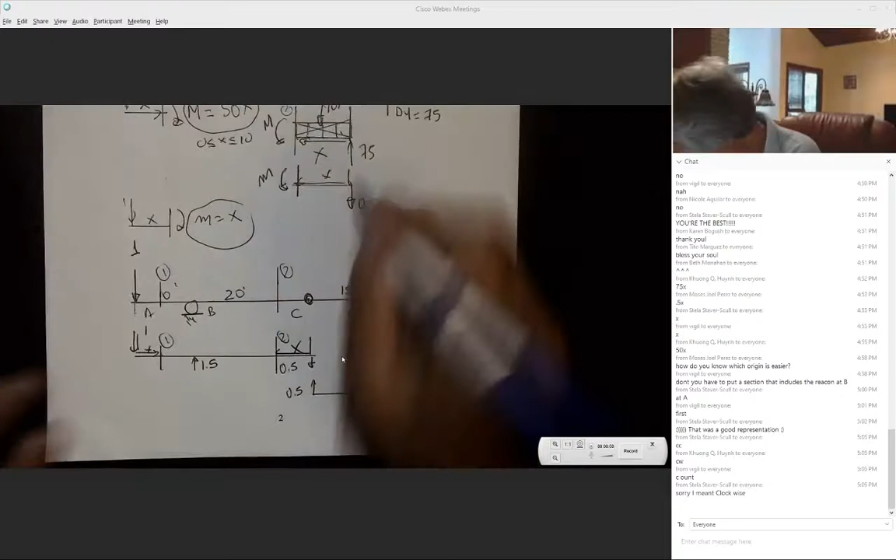So look, this is my free body. I cut it in here between 0 and 20. Don't worry. So look, I have to assume both of them in the same direction. It doesn't make any difference. If you select this direction for both or the opposite, the answer is exactly the same.

I'm going to apply moment about this point because there is a shear force there. Why am I using this portion? Because that's all the forces that I have in here. If this were a continuous member, if I didn't have a hinge in here, I cannot do it because there's going to be a moment. So I had to consider everything to the end. If this were one piece without a hinge, I cannot do this, or I need to find the forces acting here. So here it's very easy because it's only one.

So when I apply moment about this point, it's going to be 75 times x minus 10x times x over 2 plus m equal to 0. So I have 75 times x minus 10x, the resultant, times x over 2. If this were a triangular load, you have to be careful because of the centroid and other things, but this is uniform. And plus m. So there's nothing easier than this.

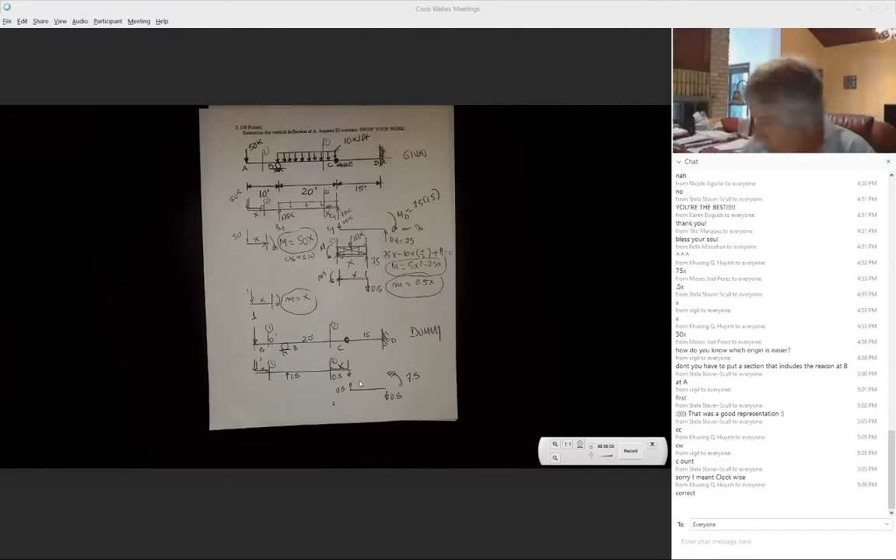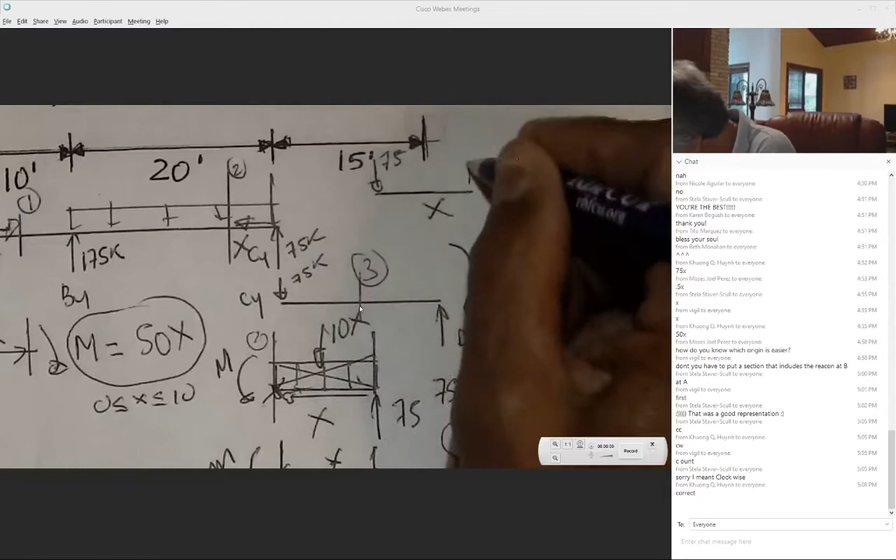So this is section 3.3. I'm going to take the free body and put it in here. So look, section 3.3 is this one. I put it in here. 75, this is x. So the moment here, 75x.

The force times the distance, and 75x minus m equal to 0. M is equal to 75x. And here at the bottom, this is my section 3. I'm going to put it in here.

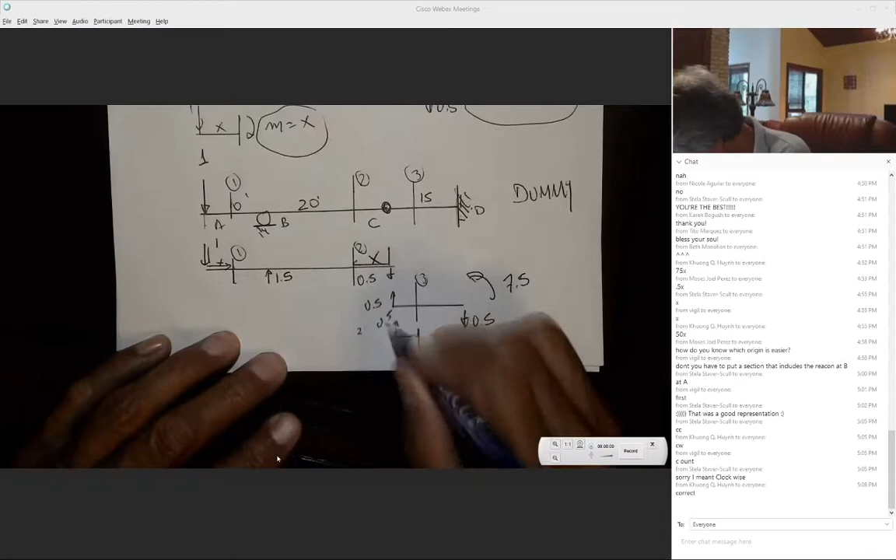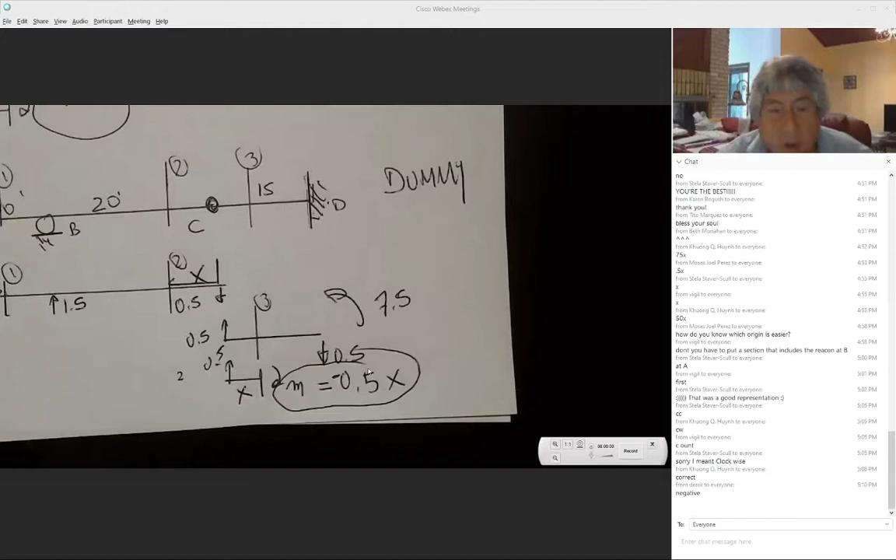Section 1, section... but look how easy the moment is in here: 0.5 times x. Look how easy it is in here, 7.5x. So after that...

I came here and did my integration between 0 and 10, 0 and 20, and 0 and 15. I did all of this that you can do in your calculator. And the deflection, look, all of this in here, it came with a minus 25, so it means it goes in the opposite direction. Any questions about this?

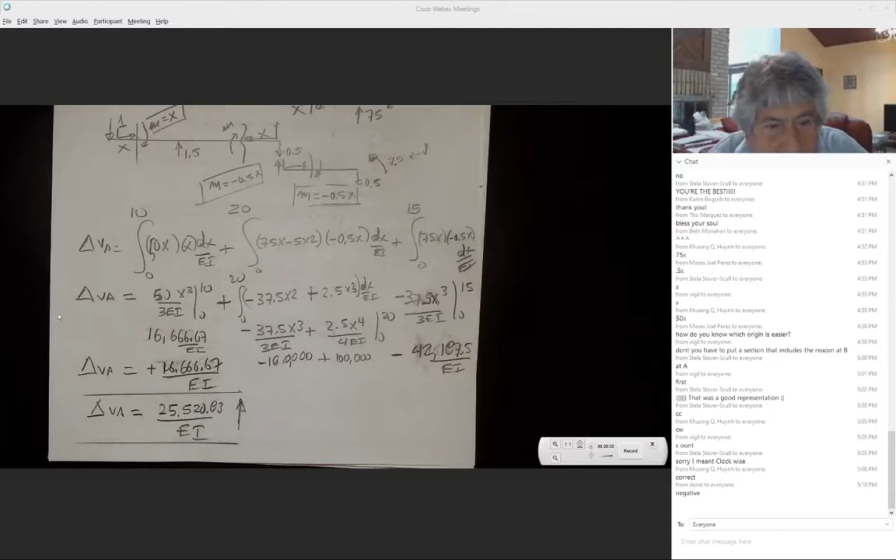Let me tell you something else. Look, all of this we already done. Now we have to do this integration. And if during the exam some of you had a beautiful calculator but you don't know how to use it, sometimes you get to this point, all of this, and you stop because you don't have time, you're going to get partial grade. But if you try to solve certain things and you run out of time, you get 0. So remember, you do as much as you can in the exam.

Any questions about this problem?

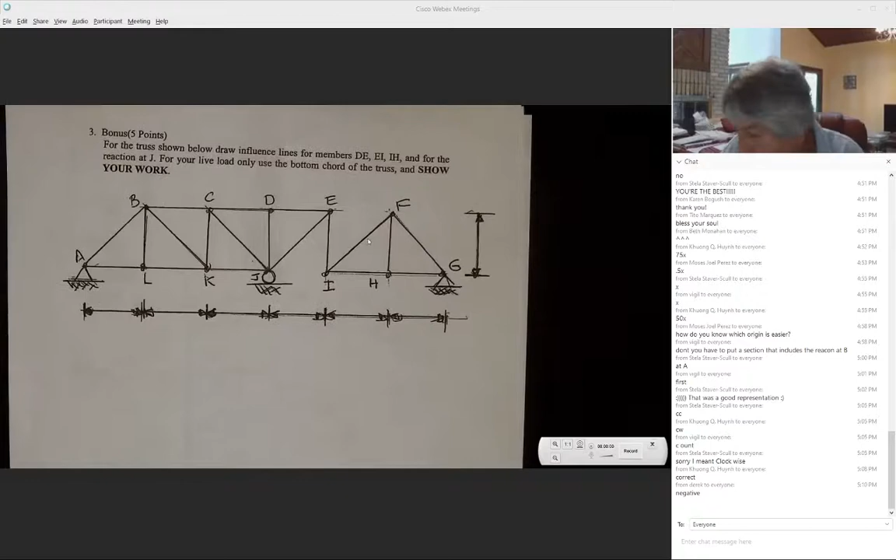On Monday, I'm going to solve this problem. And also, you already had this problem. This is a very interesting problem because the computation of the reaction, this is a determinate truss. The most difficult part of this is the computation of the reaction. So on Monday, I'm going to go over a truss. I think I have a frame.